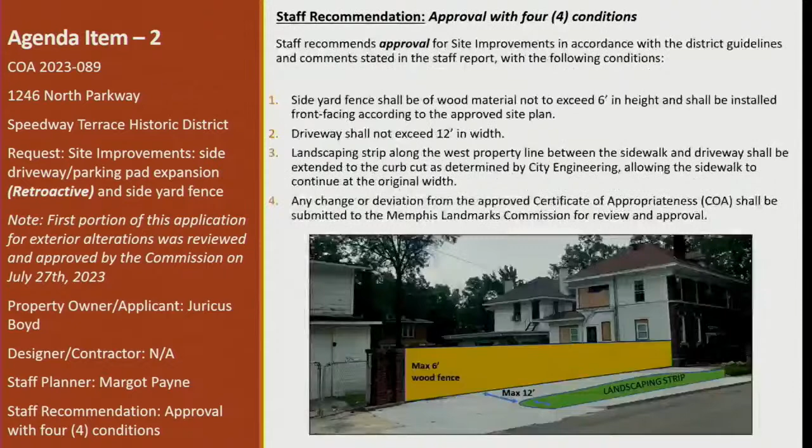Mr. Secretary, would you call the first case? Item number 4, COA 2023-125, 1940 Netherwood Avenue in the Glenview Historic District.

Okay, thank you. Is the applicant present? Could you come forward, please? Thank you. Could you state your name and address? My name is Nicole Lawrence Lowe.

Okay, thank you. Would you hold your right hand up? Yes. Do you swear to tell the truth, the whole truth, and nothing but the truth, so help you God? Yes. Thank you. Have you looked at the staff report? Yes. Are you in agreement with the staff report and its conditions? I am not in full agreement of the staff report and its conditions.

Okay, thank you. We're going to have the staff show it. Okay. Okay, go ahead. Thank you. Nicholas Wardroup, Division of Planning and Development. This is a request in the Glenview Historic District at 1940 Netherwood Avenue to replace doors and windows and do roof repair, but also construct a new second floor and rear addition to a historic structure.

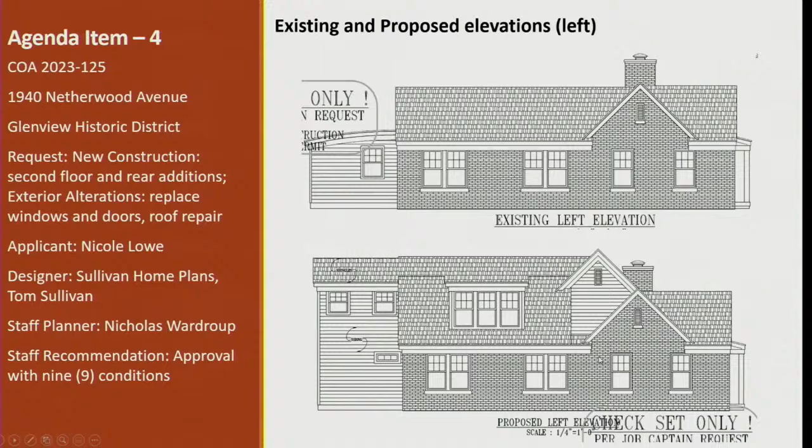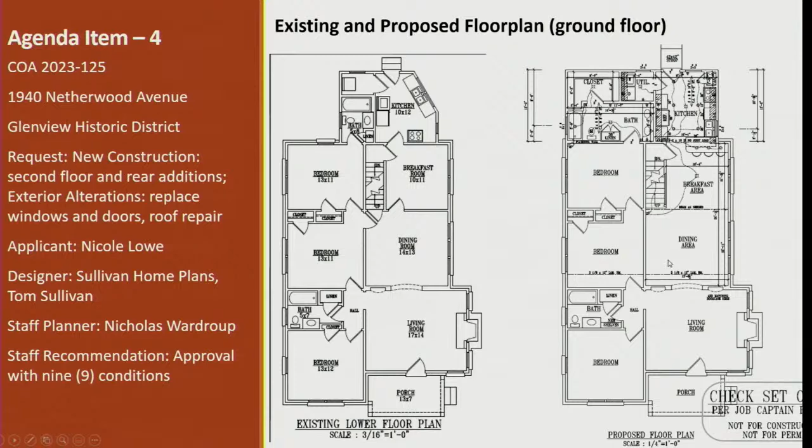Here's an existing and proposed floor plan. I can come back to this later if anyone has questions about it. Here's the ground floor and the second floor.

Getting into our analysis of the Glenview neighborhood guidelines, first talking about mass and scale, essentially we feel that if the addition was constructed as designed, the structure would no longer appear mass and scale to the traditional neighborhood structure. It also lacks the modularity encouraged by the guidelines and would overtake the original structure in terms of visual impact, where the guidelines encourage all additions to be subordinate to the historic structure.

However, and this is basically our central finding, we feel it's possible to address these issues through a revised design, like our proposed sketch on page 8 of the staff report. That's why we're recommending approval subject to a revised design and staff review of that design. The guidelines encourage 1 or 1.5 story heights along the street, which is why staff is recommending the addition be shrunk and the mass of it be moved further away from the street.

Another key recommendation of the guidelines is that the original character of the structure be preserved, so a pedestrian walking by can tell this is the historic structure versus the addition. Staff feels the design as proposed does not do that, but it's possible to do an addition somewhat like our proposed revision that would achieve that guideline.

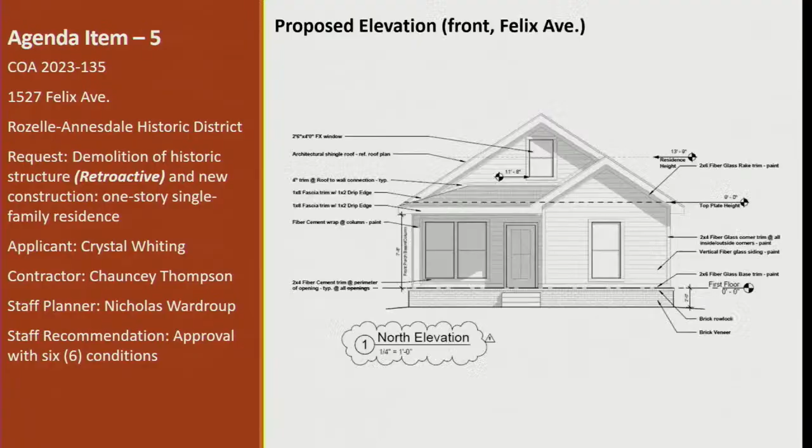I understand what you're saying, and the sketch staff proposed makes it look like maybe an addition in the back. But I think that's the purpose in some ways—to make the addition feel subordinate to the main historic structure. One concern I have: if you look at the slide showing the existing front elevation compared to the new elevation, the mass of the addition as currently proposed has a much larger presence on the street, and it's not as scaled to the human as the design guidelines suggest. There's much more of a, forgive the term, forehead on the front of the building. The addition comes closer to the street and presents more roof area, which increases the height, mass, and overall feel of the structure on the street.

I think what staff's proposal is to pull that back on the existing building a little further, so that the front part of the building that's historic maintains its historic structure and presence on the street. Right, it maintains the existing roof line and lets the addition be subordinate to that existing structure, which the guidelines suggest, and I do think it's appropriate.

I understand the applicant's concerns about square footage and usability of the house, and she made some good points about the usability of green space. If the square footage she needs has to be pushed further into the lot, I understand those things, but I do agree with staff's interpretation of the design guidelines.

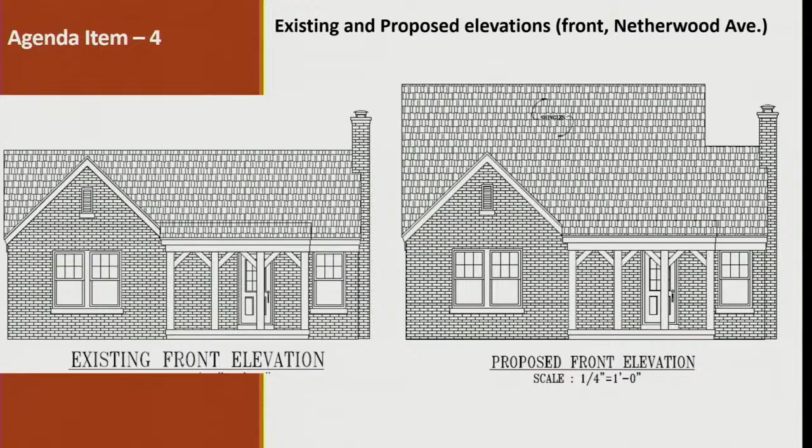So in this drawing, the roof line just goes straight. There's no old roof line, or is that just a bad drawing? It goes up. I think both are true. My understanding is that the addition would come...

Right, and just to leave the existing roof line essentially the way it is. There's still some attic space access existing, but it's pretty minimal, I would guess. So the proposal is to expand that, and with that expansion is what we feel is really adding this piece that can't really be integrated, or at least it hasn't been proposed.

Is that accurate? So by doing that, it disconnects the existing roof line from the proposed roof line, right? So essentially that's taking away that front part of the new recreation area, just pulling that one back a bit, and making space into the existing attic area as well. So essentially we're just removing that additional attic space that's above the living room and bedroom section.

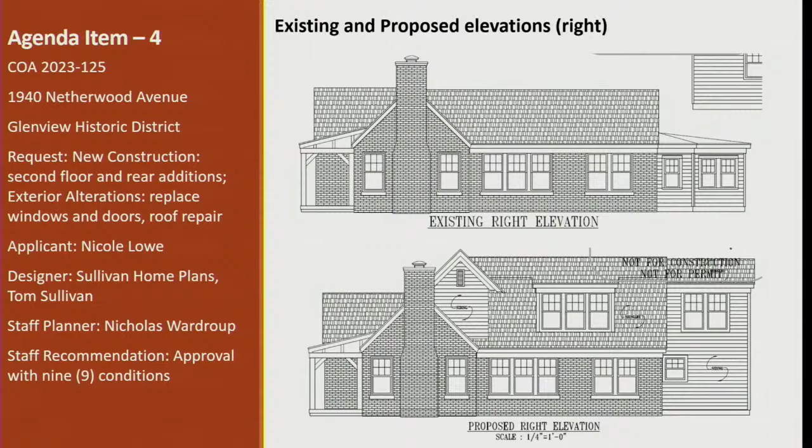Right, and our last case, we are not sure if the applicant is here, but I think they may be. It's item number 11, COA 2023-1.